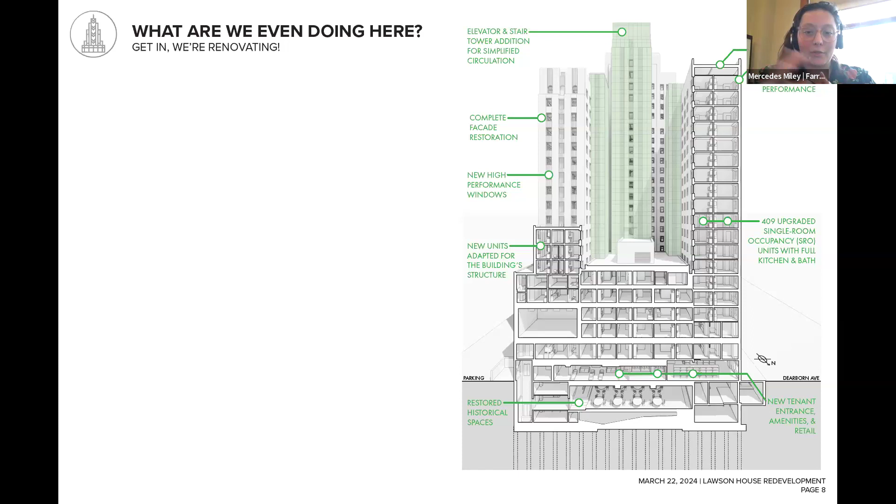And then the tower there in the center is the elevator tower with an elevator that now goes to all of the floors. And then I'm gonna save all of the historic restoration stuff on the outside for Tom a little bit later. Next slide.

This video isn't working right now, but I'm gonna drop in the chat some videos if you just wanna get a look and feel of how the project went through the restoration. These videos were done by Walsh Construction, the contracting partner, and they did a phenomenal job documenting the project. If you wanna learn more, their YouTube page is a good place to start.

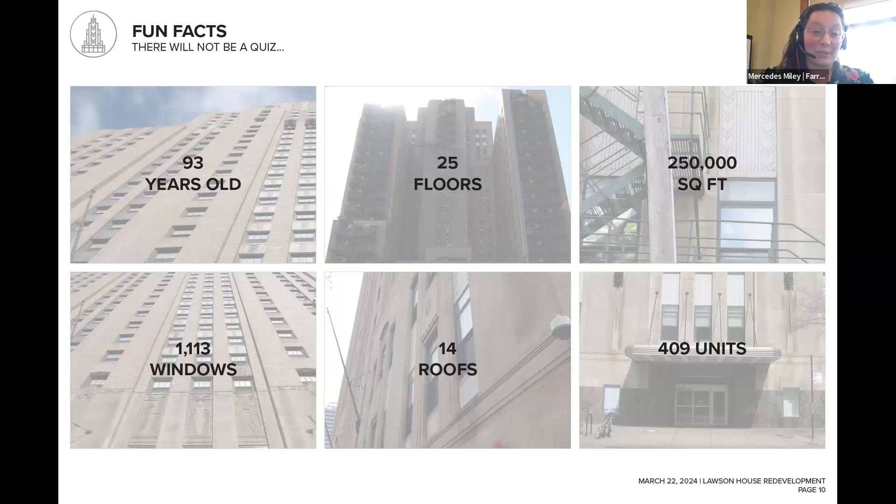Next slide. So fun facts, there will not be a pop quiz, but you are free to take notes. The building's 93 years old, 25 floors, including 2 sub-basements, gross square feet about 250,000, over 1,000 windows. That will come up later, 14 roofs, and then 409 units. Next slide.

As you saw in the introductions, I've been working on this project for 6 years. When I came on board, it was already at 50% CDs. Now I'm considered the OG of the group. So I don't know what that says about everyone else in my presenters. Love you guys. Next slide.

The design team originally did a ton of research. They taped out how the units would look on the floor so that people could stand in them. They did historic documentation of all of the different rooms, built models, had on-site meetings, interviewed residents.

Next slide. Some of those residential interviews are on the screen today, synthesizing what people said in a very human term, right? I can't control my heat, it's always cold in my unit, and taking that into design: what does that mean from a thermal comfort standpoint and also a user control standpoint? And how can we translate these folks' real experiences into something that the design can be proud of and then really give it back to these tenants?

So next slide. You'll see this diagram twice. The building is very large, so it doesn't work on a landscape format here, so we've snipped it down so you can see a little bit of everything. You have residential units, your circulation, some office space, tenant amenities. It all needs to fit into the existing footprint.

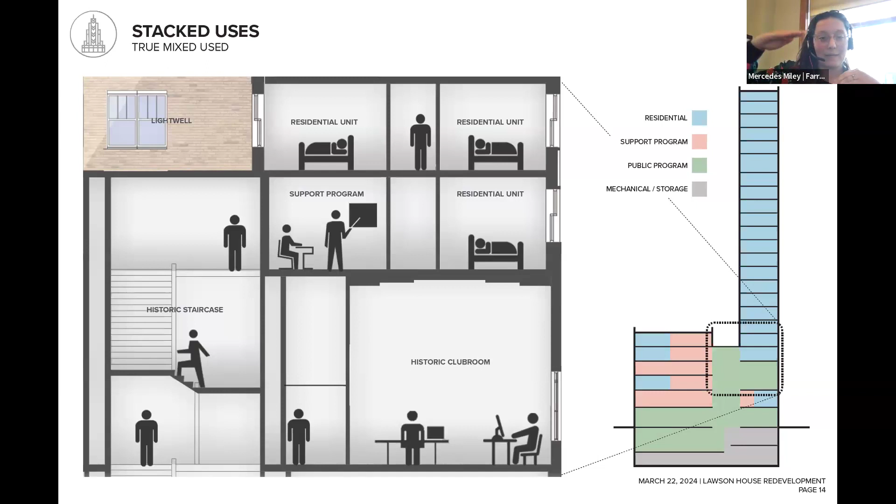And for the 4 different kinds of users of the building, people need to arrive at the same entrance, go up into the elevators and the common areas, and then disperse from there. And that experience, depending on if you are staff for one of the social services, a tenant, or a maintenance employee, is a little bit different and unique. So that all needs to nest on top of each other in a very interesting floor plate that does not pancake at all. Next slide.

And then in the units themselves, the design team really did a deep dive into what 200 square feet looks like. In a typical building, you move the wall an inch and, okay, no big deal, that's a plus or minus on the plan. Here you move it an inch and it's a 5% reduction in living space for a resident. So that's a huge deal.

And trying to understand what is the furniture going into the space, the kitchenette. There's 2 different types of kitchens throughout the building, one that's accessible and one that is a type B unit. And making things standard where we could in order to best fit into the very unique floor plan that we had. So the design team in the beginning did a really good job of getting into what that unit looked like with the little square footage we had per space. Next slide, please.

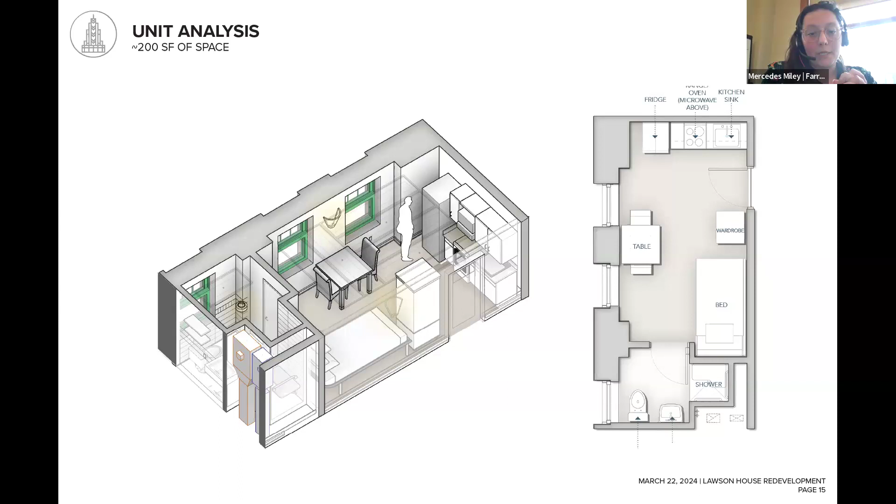All right, so Farr Associates is very dedicated to prototyping the future, and we are very interested in creating sustainable buildings as our baseline. And so because of that, you can see the 3 different high performance rating systems on the screen. The building was designed for LEED Gold. We're pushing for platinum. We have 1 point left that we are not done with. So if anyone wants to brainstorm about that last point, what it could be, let me know.

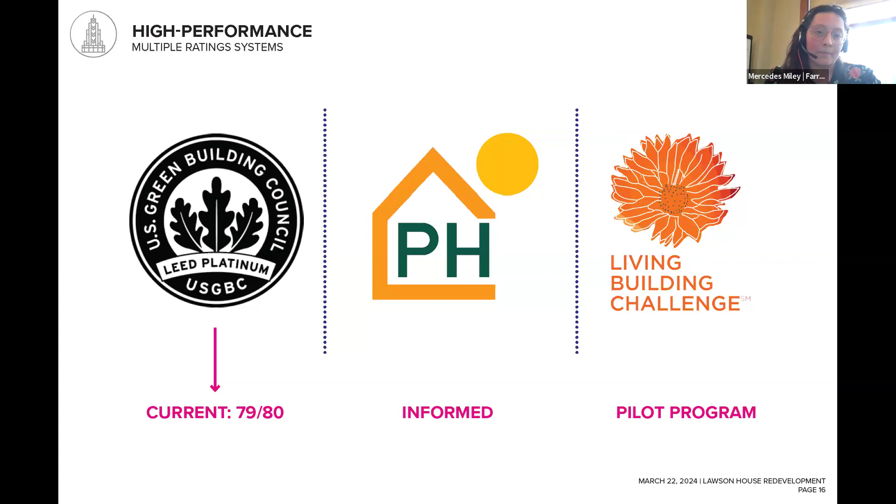Back in 2015, when the building project started, Living Building Challenge and PHIUS did not have grading systems that really responded to renovations. So this project was part of a pilot program in order to kind of facilitate and push for the renovation of buildings and what green systems look like in old buildings. Next slide. And I'm going to turn it over to Sachin to talk about energy and water.

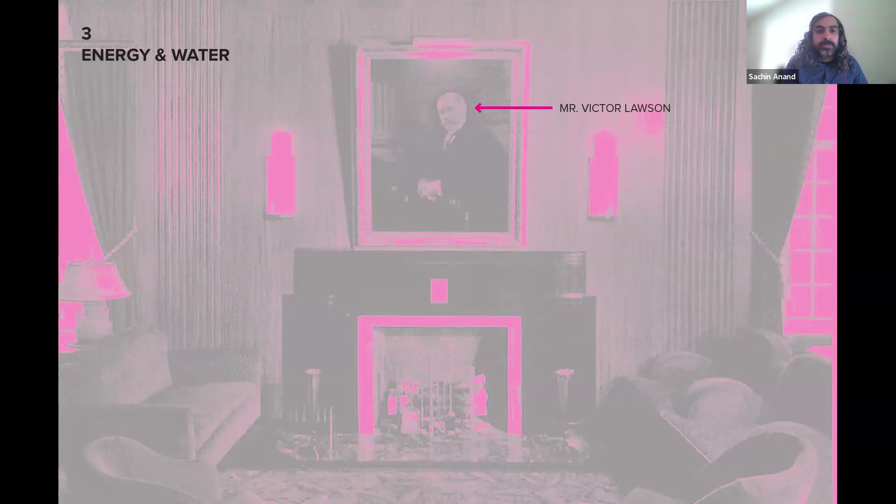Thank you, Mercedes. So I'm going to talk about energy and water here, and the way I've organized the slides, we're going to talk about some of the information which we ended up with in terms of how the building systems are, but also talk a little bit about the story in terms of how we got there, what else we looked at, what were some of the ideas along the way, and hopefully that's helpful to folks working on projects like these, which are renovating these older jewels.

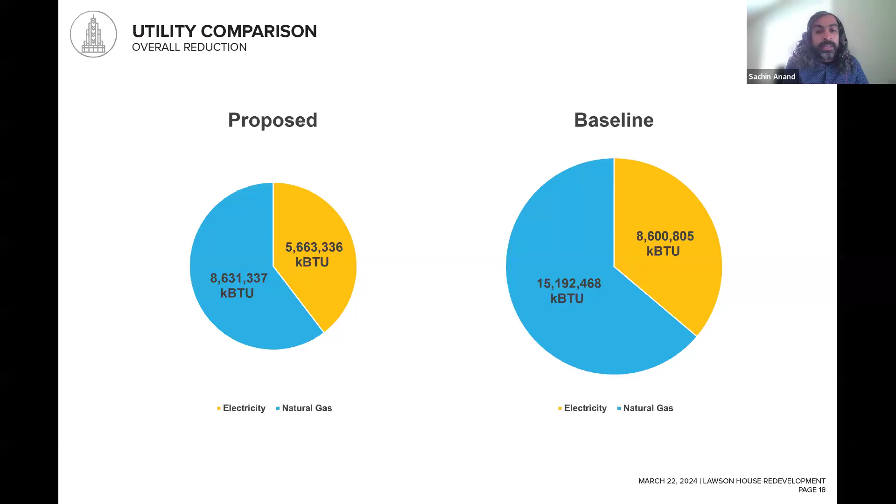So next slide, please. I want to start off with where we ended up with our energy pie. You can see on the right what our baseline is, and to put this in context, the EUI for the baseline is 95 kBTUs per square foot per year, and the proposed is 57. So it's a 40% reduction there. And on the next slide, you start to see how this breaks down, and really it's kind of expected in a lot of ways.

When you have a residential building like this, the main drivers of energy are heating in a cold climate and the service water heating. This building luckily does not have a very high window to wall ratio, so that helps, and we'll talk a little bit more about the envelope improvements. Those are what drove the reduction in the space heating, also with more efficient equipment, and then also on the service water heating, which is your domestic hot water, with high efficiency equipment.

So really what the building has in terms of systems is a fan coil system, and I'll talk more about it in a little bit. We've got a 2-pipe fan coil system for the residential, and for the common areas, we have a more standard VAV system. Some of the unique spaces actually have fan coil units as well, because in a building like this, which was originally designed with no air conditioning, getting air conditioning in it can be very challenging, for those of you who work with an older building like this.

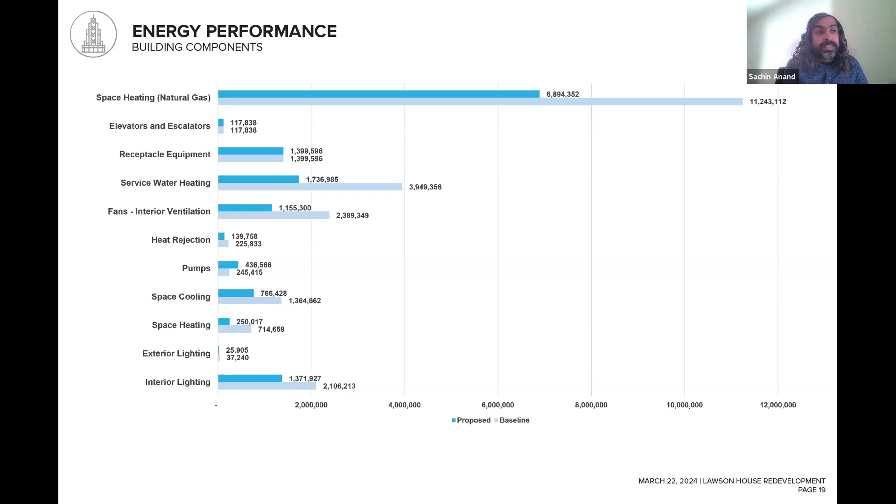One of the other stories which I remember from the project is upgrading the power and the Commonwealth Edison vault, which is underneath the sidewalk on the street. So that was quite a task, getting that through on this project. So moving on to the next slide.

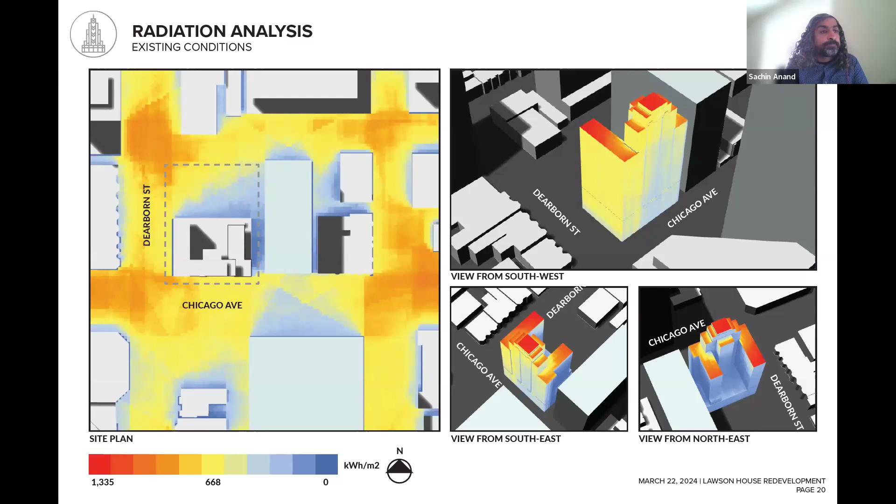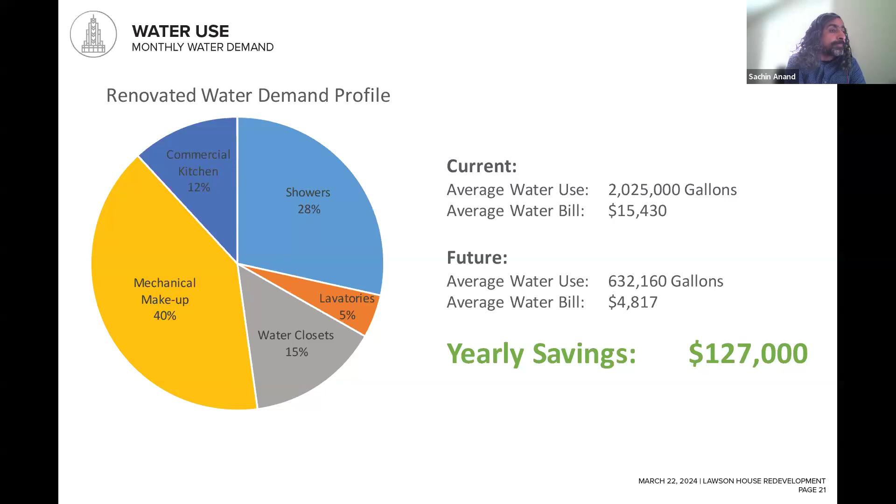With radiant cooling, humidity control becomes key. The advantage there was these rooms, the individual dwelling spaces, are fairly tight. So if we put radiant ceiling panels in here, we could actually save that space which a vertical fan coil would take up. And also it performed better. Also, in order to control humidity, we were delivering fresh dehumidified air directly into each of the dwelling units. So it's got a better indoor air quality inherently in that system type.

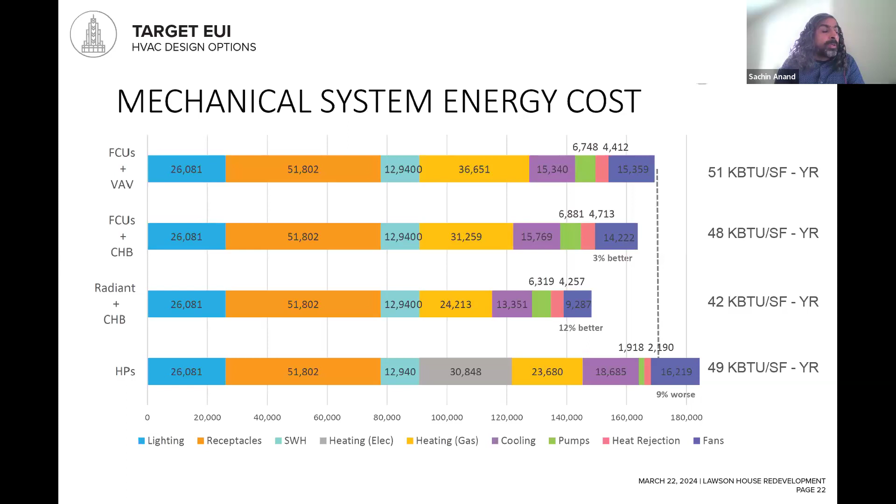There was a substantial premium for doing that. We tried looking at it. The contractors were involved early on. It was a very collaborative process, but unfortunately, we couldn't make it. Also, the return on investment there didn't quite work out. So if we go to the next slide, you'll kind of see these options.

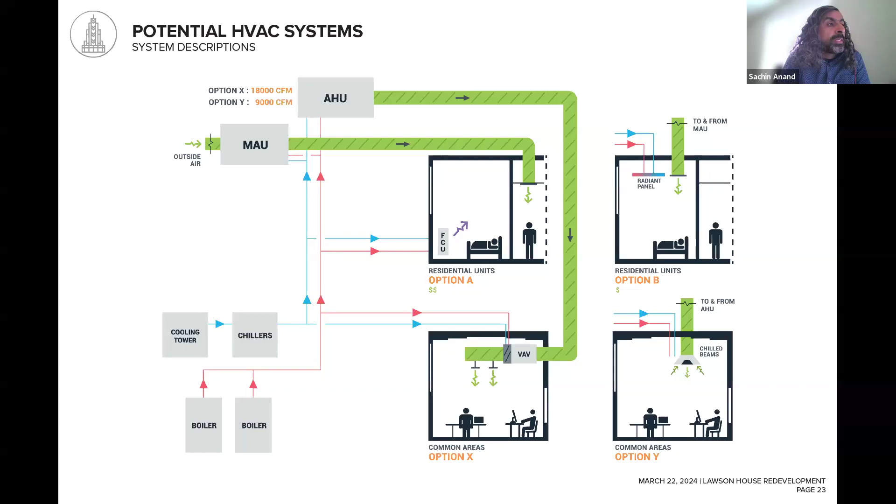So you can mix and match. So for example, you could have had option A and option Y, or option B and option X. So you can mix and match that, and that's kind of how we evaluated these options. One of the things we've realized is when we put diagrams like these, it helps folks understand in a conversation how systems work. So next slide.

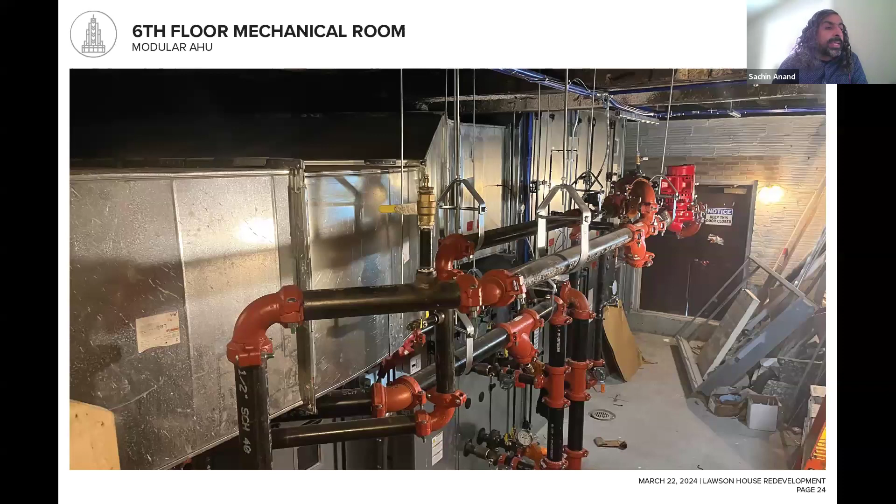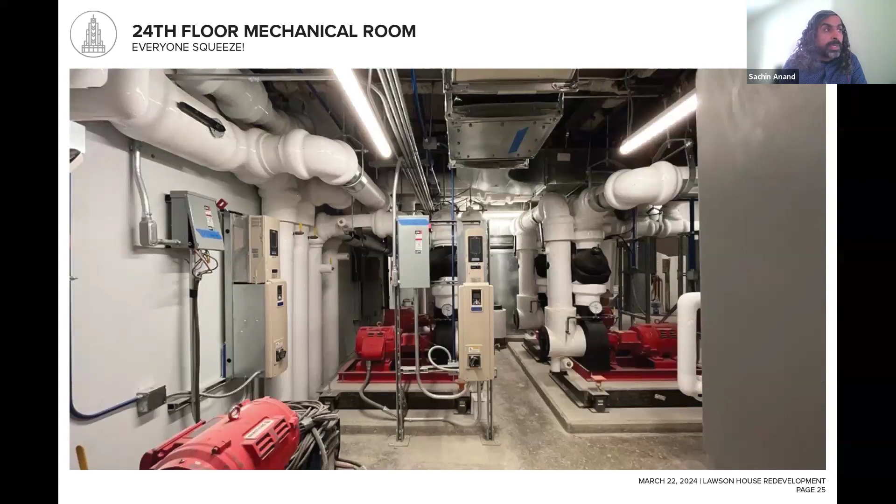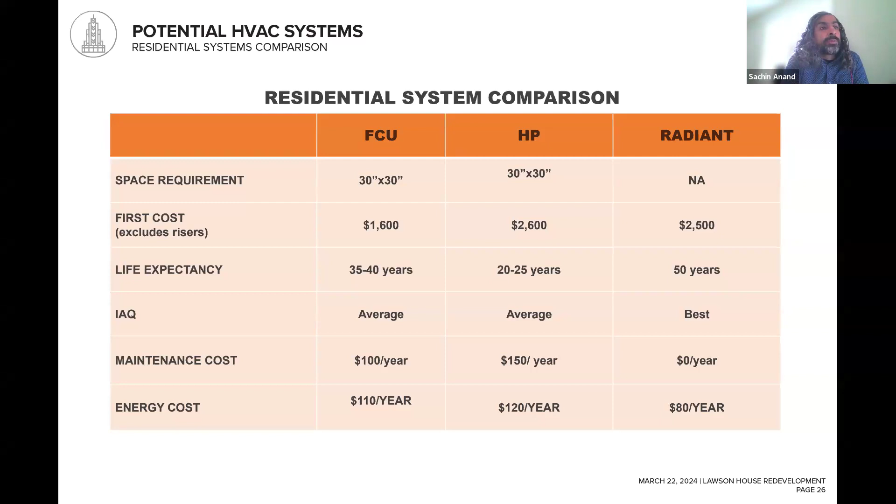We kind of started to look at it. You'll see the first cost numbers with the radiant were fairly competitive, and this was our estimate. And when we got the contractors involved, those numbers were greater, and there were other concerns with the radiant system. So we ended up not with the radiant, but with the fan coil system. So it was a good exercise, working our way through this and seeing what we could achieve. Next slide, please.

So moving on to some lighting analysis. Very often we do daylighting analysis on new buildings because we think there's an opportunity to adjust the massing, adjust the facade. But you would wonder, why would we want to do daylighting analysis on an existing building? And really the purpose here is these three slides, which you can see here.

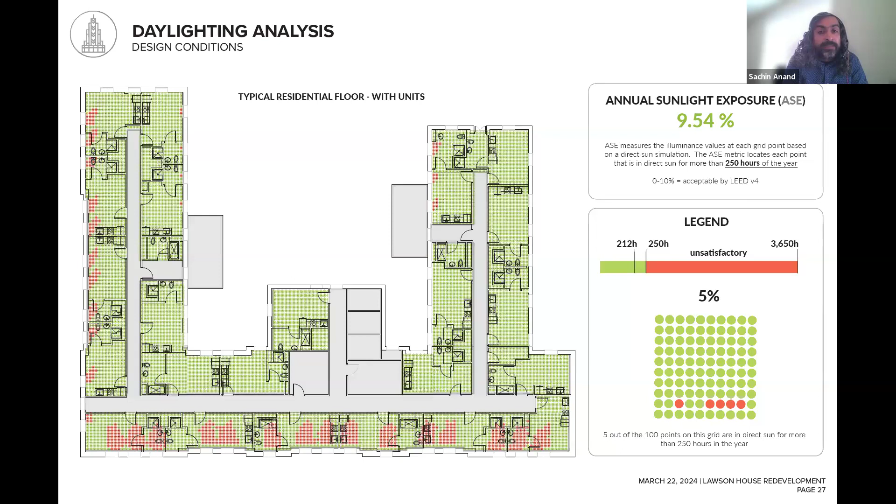With the first one, the annual sunlight exposure, the red dots represent where you would have a potential for glare, which is of course on the south of the building at the bottom there, and on the west to the left of the image. And we're trying to fine tune where this would be. Of course, with glare in a building like this on a typical residential floor, you're going to have shades in the building, so you can tackle that. If we go to the next slide.

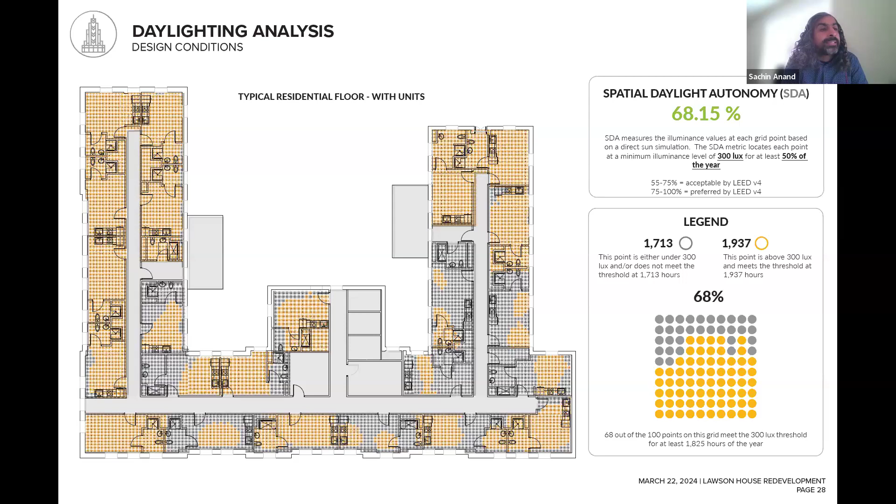So that talks about the spatial daylight autonomy, and you can see where the gray dots are. It's really on the inside of the building, and we used that working with the architecture team to see if we could place elements of the program which are back of house, like electrical rooms, bathrooms, things like that, where daylight was not as key. So that's how this analysis informed that. And then the last slide here, next slide, please. Again, we're trying to fine tune our daylighting analysis.

Next slide. So with an SRO, it's kind of hard to compare this in terms of lighting power density. What do you compare it to? It's not quite a hotel. It's not quite an apartment building. When we set an initial target for the lighting power density, we kind of made an assumption. We said that this was closer to hospitality rather than an apartment, and so we grabbed that as our baseline, and then we established a design target, and then we designed all of our lighting to that.

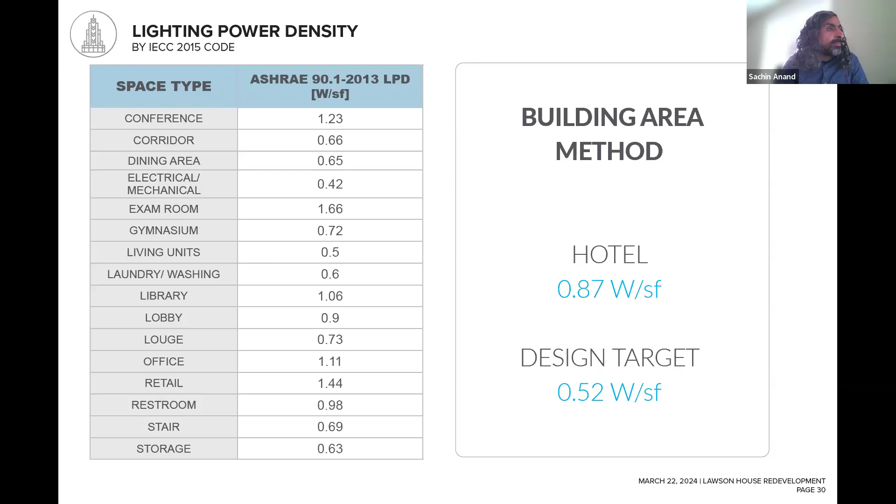And as you're all aware, over the last several years since this project started, LED lighting has come a long way, so that worked out in our favor, and we were able to realize some of those savings. I think that was the last slide of my portion here. I'm going to hand it off here.

Thank you, Sachin. Go to the next slide, please. So early on, the design team did a lot of thermal imaging and worked with dbHMS and Sachin's team in order to understand the energy modeling of the building. And so these are just some of the photos that they took really early on. And you can see the disparate conditions across the whole facade. There's 4 sides to the site, but there's like a bazillion sides to this building.

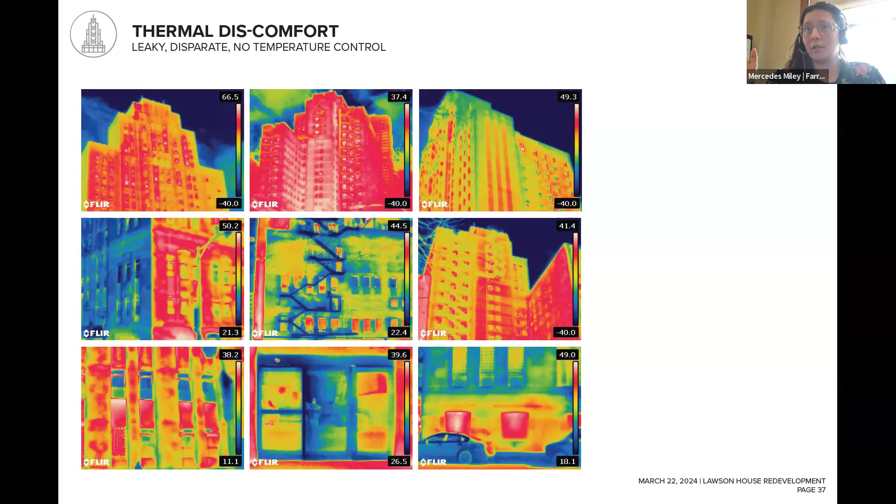Next slide. And so if you're thinking about a tenant in an individual unit, how can you try and provide an across the board experience, whether you're located on the west side of the building or the south side of the building, on the 19th floor or the 6th floor? And so what we're looking at is a holistic approach across the building in order to bring the whole building up energy efficiency wise. And so I've listed some of the systems, the building components, off to the right.

Roof: an R32 roof assembly. There's also a green roof on the 19th floor, partially occupied, partially not. Walls: we have a couple of pictures coming up that show spray insulation and how that impacted the walls, bringing it up from a masonry building to a more dynamic envelope system.

Operable windows needed to be had in all of the units, but then how do you try and get the lowest U value possible for those windows that also have historic profiles and custom profiles? Talk about expensive. And then consideration to the historic spaces and individual user control.

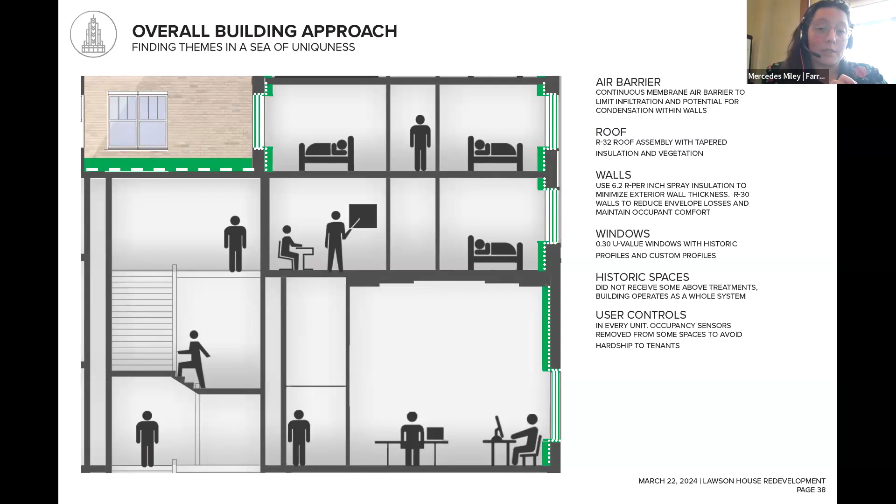Next slide, please. So what that means in practice is some of the spaces which are historic spaces, for example, this is the laundry room in the basement, we left as is. And so we tried to return it as close as possible to the original condition. The black vitrolite, the original plaster ceiling, pretty much everything except the floor and the sprinkler pipes are the original condition, and we returned that and saved that and treasured that. Next slide.

And then everywhere else, we are like, all right, let's go improve this envelope. So the left side is the existing wall assembly. We have, I think it's a Sears catalog, or it's not Sears, but we have kind of the original catalog for this masonry unit that they don't make anymore, called UniBacker. So that's kind of an interesting assembly.

And then on the right-hand side is where we ended up, more or less, as far as the existing envelope and upgrading that to be an R31-ish, R32 system. Next slide, please.

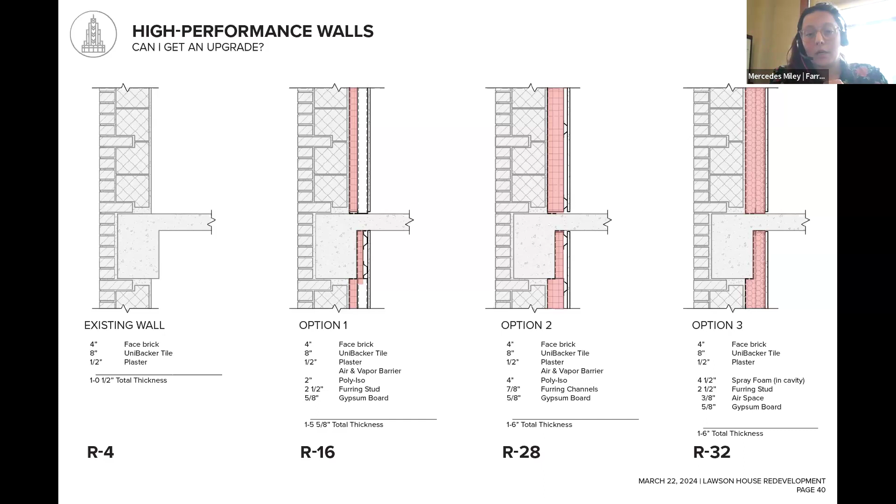And then all of our PHIUS folks on the team drawing your lovely thermal envelopes. That is very difficult when you have a building that has as many corners and as many openings as this, but the design team did a really, I think, bang up job in trying to get that done. And every detail looking at how can you continue that barrier from inside to outside, across the whole envelope system.

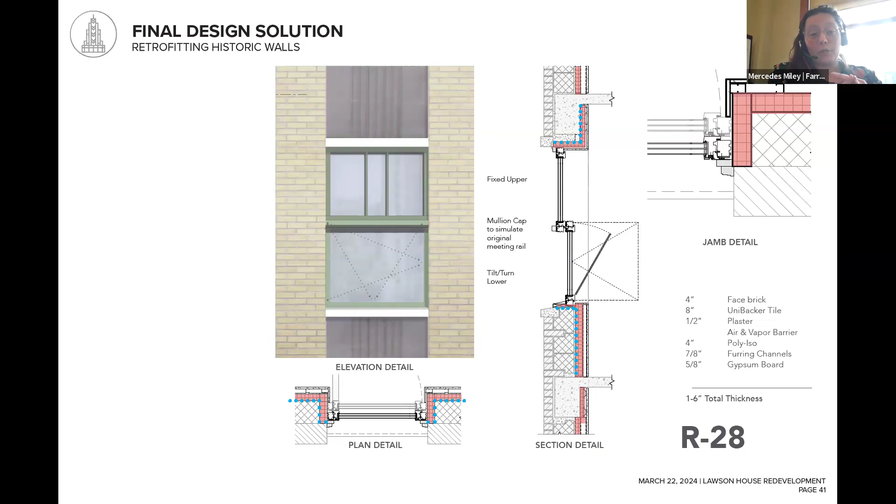And again, we did it where we could. There were some spaces where it's a historic condition and we couldn't put any of these interventions in. But where we could, we did all the right things. Next slide, please. What does that look like in practice? These are some installation photos of that spray foam installation.

Our details also had originally rigid board going 2 feet on the slab. And that was meant to break down, because of how the concrete works, the thermal bridge from the outside to the inside. And so we had a rigid board installation kind of stuck to the underneath side of the slab in order to reduce that transfer.

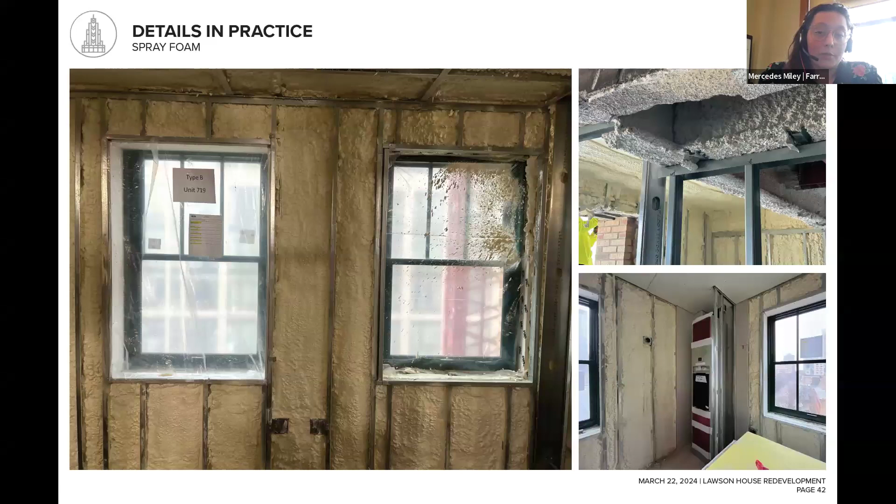The contractor said, well, we're kind of already spray foaming. Can we just keep spray foaming and just keep going? And it worked out the same thermally and actually was cheaper. So we said yes, and that's what you're seeing in these photos. Next slide, please. All right, handing it off to Tom to talk about the exterior.

All right, thank you, Mercedes. So as has already been explained, the building, even though it's square or rectangular in plan, there's a lot of offsets. There's, if I counted right, 47 unique drops where we hung swing stages from to perform our inspections and for the contractor to perform the work.

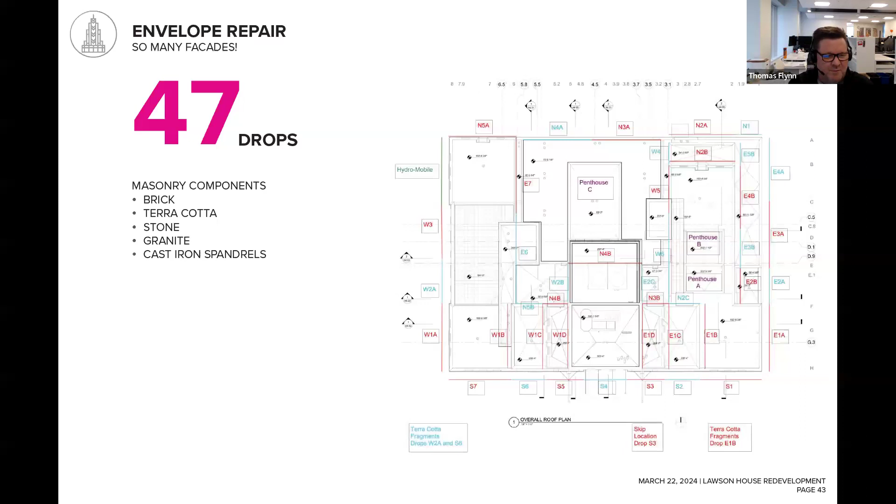The building also has a variety of building materials: brick, terracotta, stone, granite, and cast iron spandrels. There's also stone spandrels that look like cast iron. So sometimes it was hard to tell from the ground which one was which. Next slide, please.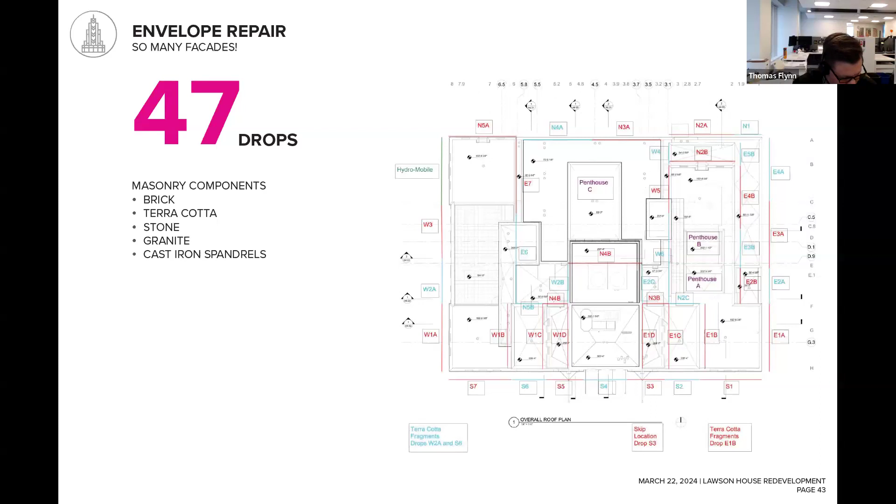At some point prior to our involvement, those terracotta heads were replaced with brick, where they added a lintel above the window, and then you have 2 courses of brick, and then the shelf angle right above that. So it's kind of an odd little detail to have that many supporting angles in close proximity.

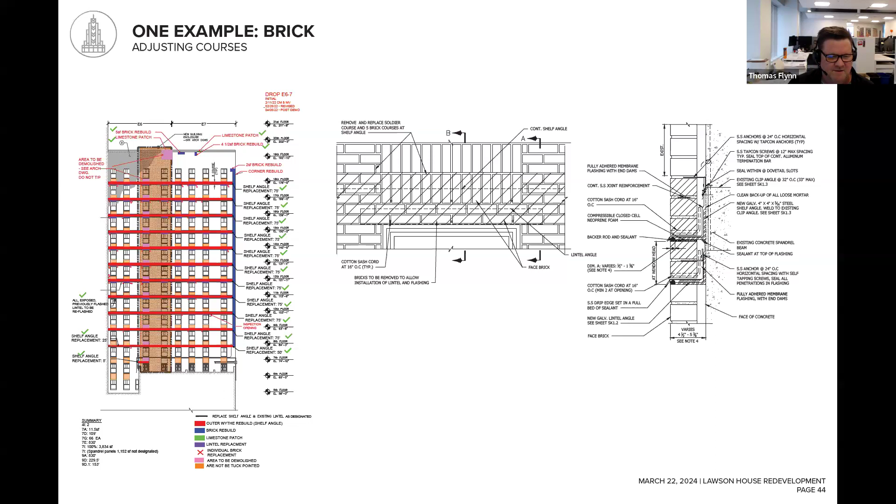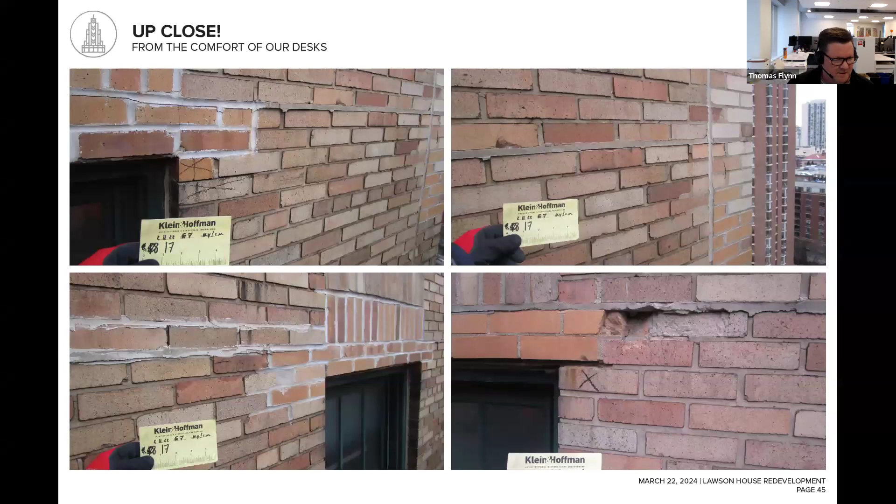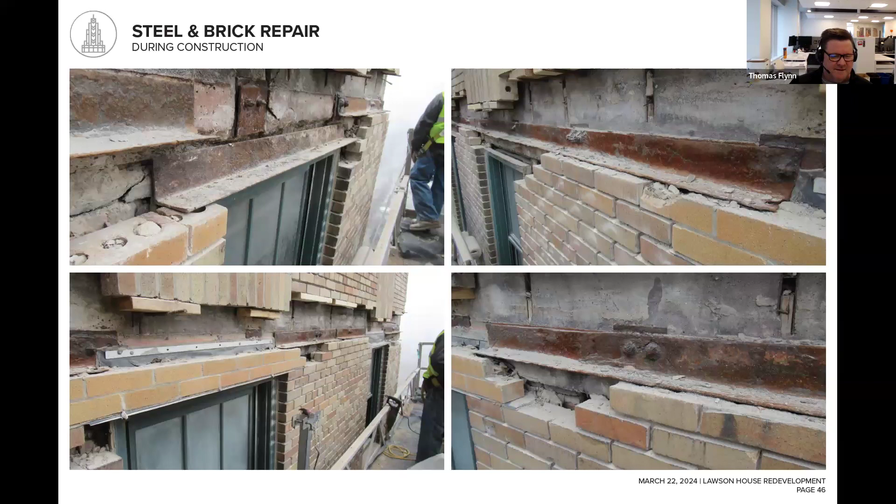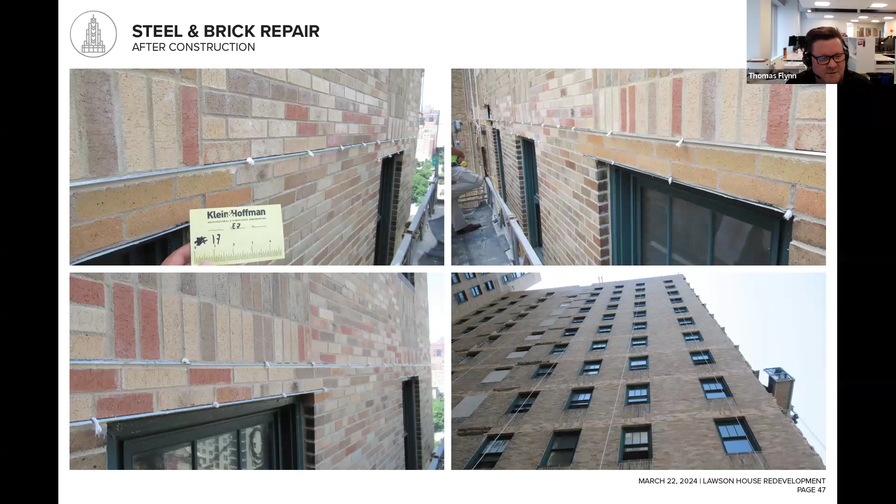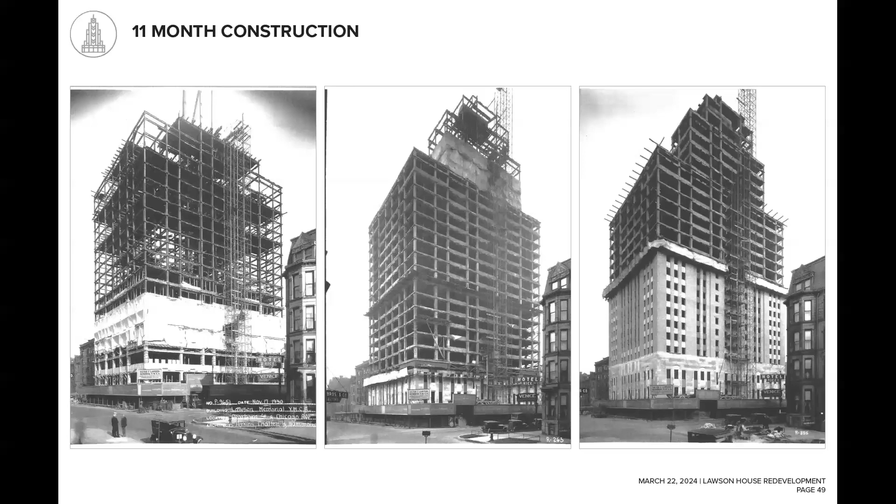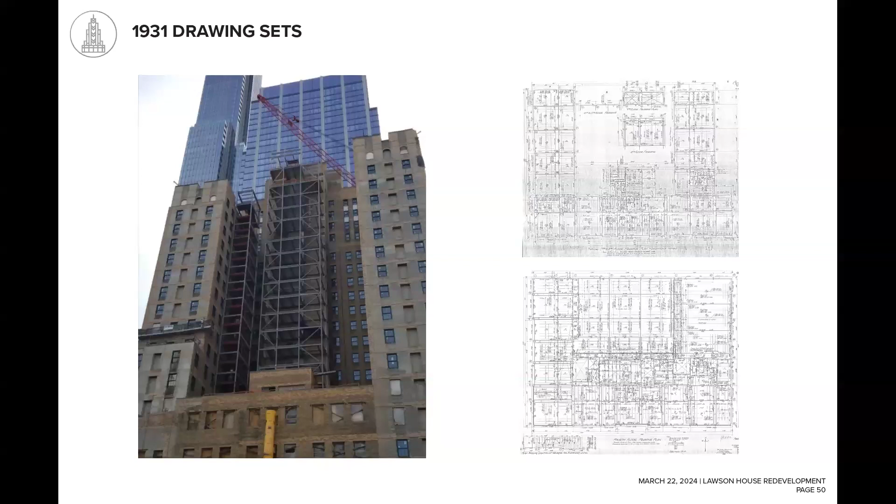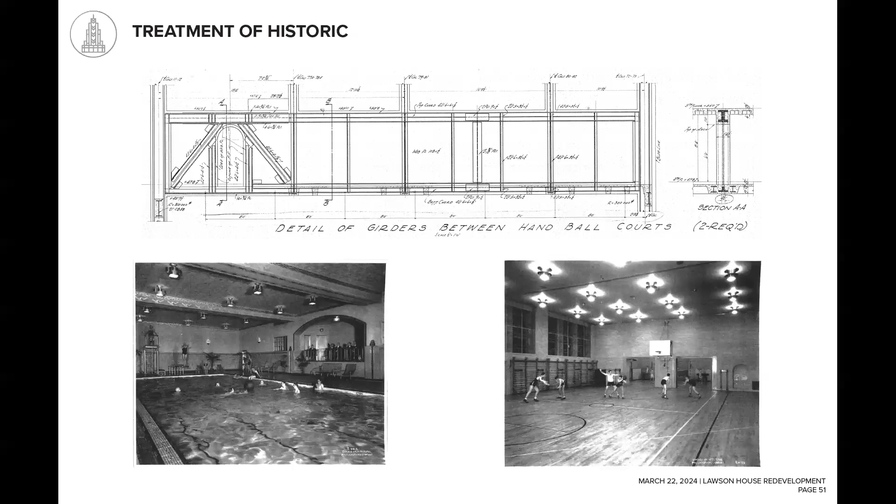So these are some of the photos during construction of the plate girders. So they're about 9 feet tall and they span about 55 feet across the whole length of the north half of the building. And we needed to add a corridor through this plate girder to get the egress path to work for the new residential units. And so the architectural solution was basically just to cut an 8-foot tall corridor into this 9-foot tall piece of structure. Next slide.

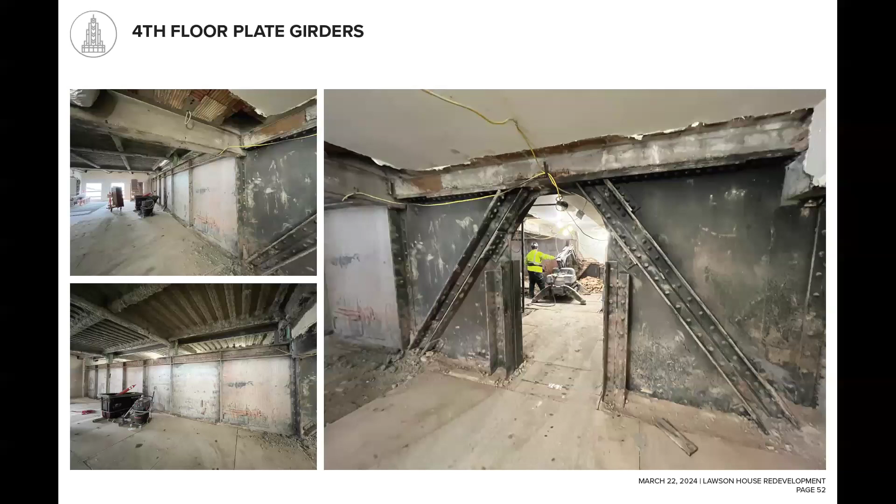So, you know, with an opening that large in that structure, it's obviously not going to work anymore to carry its original load. So we considered a lot of different options, but one of the ones that we took the furthest was to do a full replacement of the plate girder with these new custom trusses. And that gave us a lot of flexibility that we could design the truss members around the corridor. We could pass mechanical ducts through the web members of the truss.

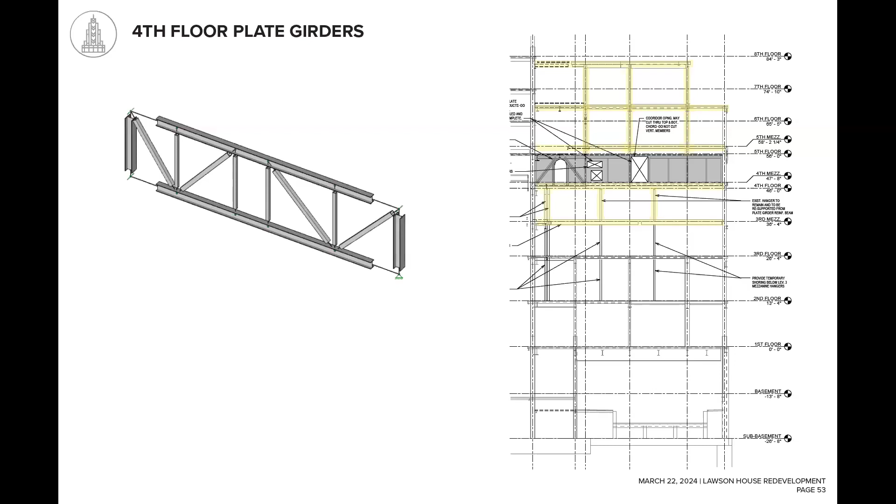But the big downside of that option was the amount of shoring that was going to be required. So in the elevation on the right side, you can see the plate girder is what's shaded in gray. And in yellow is shaded all the 5 levels that would require shoring when they did the demolition of the plate girder. So next slide.

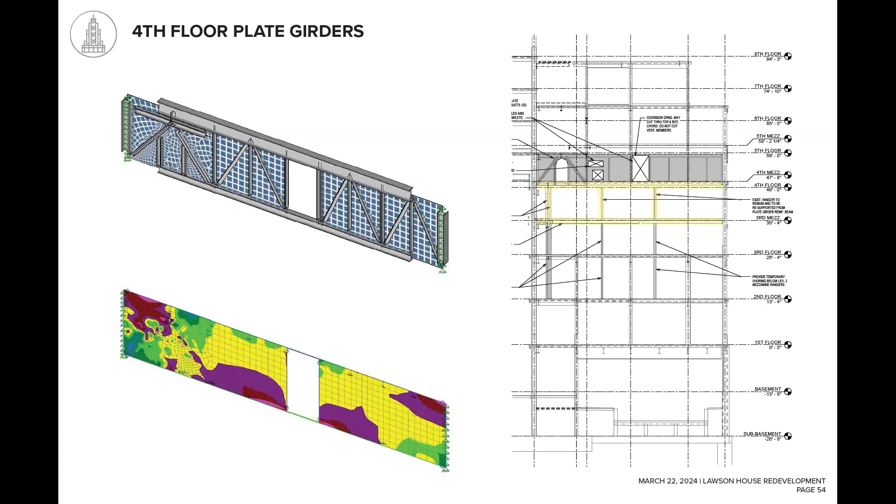So ultimately what we decided to do was create sort of a hybrid of a truss and a plate girder and reuse the original plate girder in its place and just add reinforcement to it. So we have some images of the analysis model that we went through, and we added new continuous top and bottom chord members, and then some angles on the web to make that truss action. And then we reduced the shoring, as you can see on the image on the right. We reduced that shoring just to the bottom 2 levels.

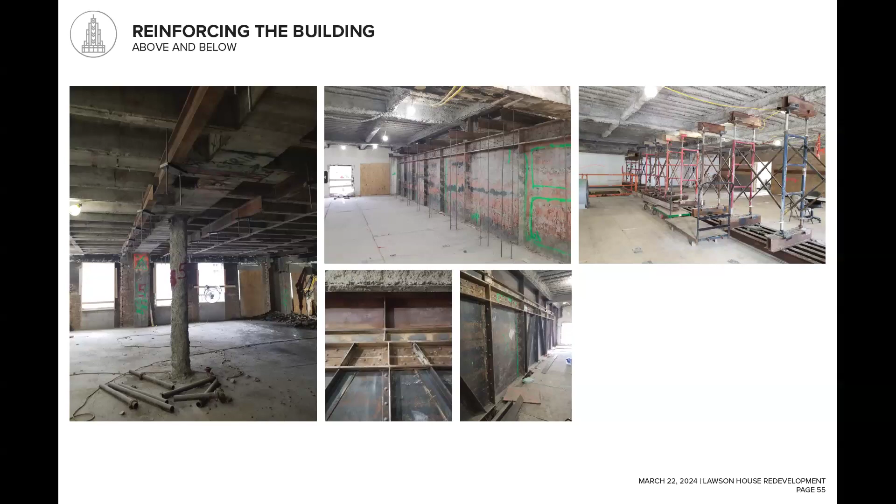And then finally at the bottom middle 2 photos, we just have some of the reinforcement members that were installed along the plate girder. Next slide. And I think that's it for me. So Mercedes. Thank you, Courtney.

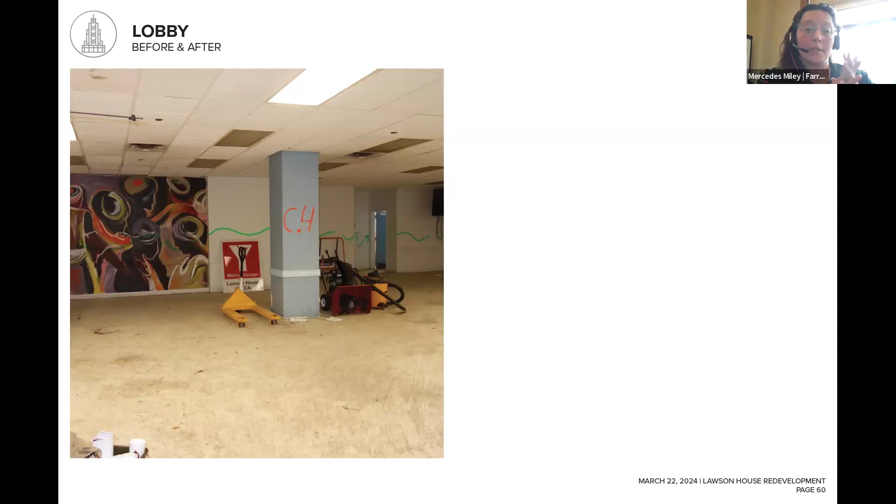I will go really quick in these last couple of photos. We've talked a lot about the building components, and so just want to wrap up and kind of end on the residents and their experience in the space. Starting in the lobby, it was very important to the client to have a look and feel that was similar to a hotel. So even though you may be coming from somewhere institutional, maybe off the streets, from another housing project, you really felt like you were coming home at Lawson House at the end of the day. And so this is the lobby before.

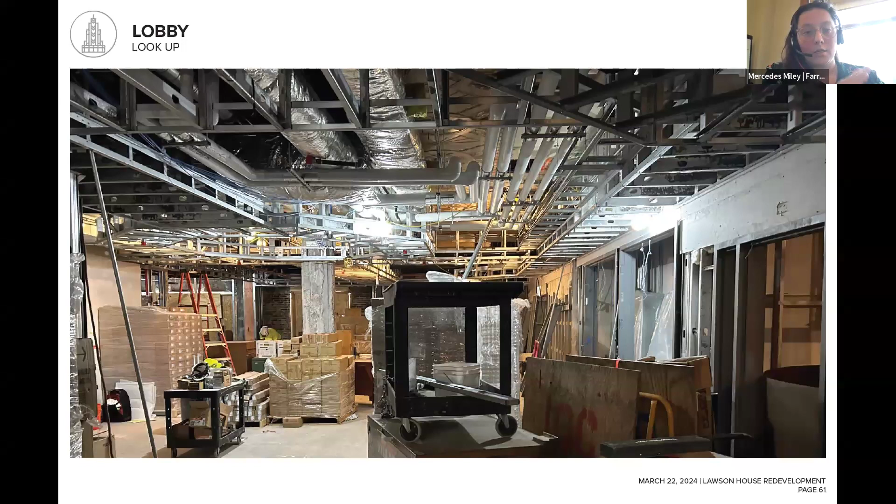And then if you go to the next photo, please, this is the lobby during construction. You know, the first floor is also a transfer point for all the MEP systems. So you have a historic plaster ceiling above in that photo that we can't damage, but somehow have to hang all of this plumbing and mechanical work from somewhere. So that was a really fun coordination effort on the first floor with the dbHMS team to get that to work and still kind of keep that historic ceiling above.

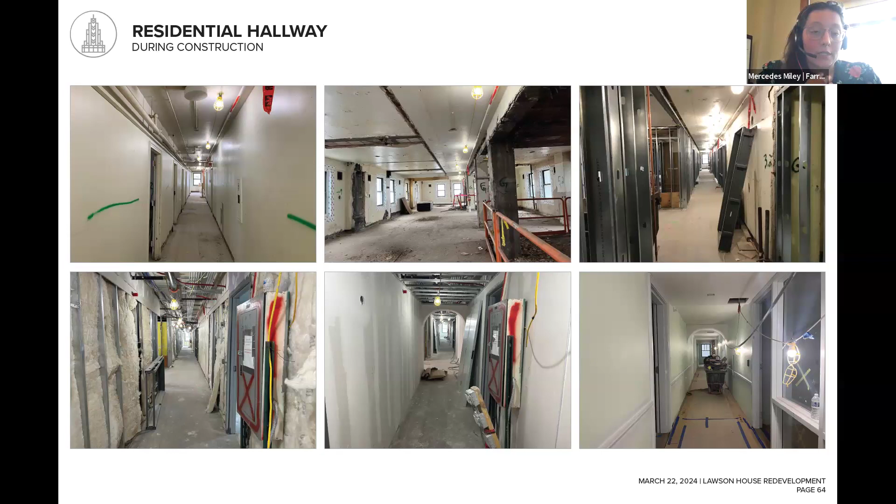And so if you go to the next slide, please, showing that process through construction, we maintained the historic volume of the space, which was considered a historic primary space, demoed out the walls though, because they were really nasty, rebuilt them, reframed them, added all of the building systems in, and then finished out the corridor with some nice bright finishes. And then if you go to the next slide, you can see that full transformation there.